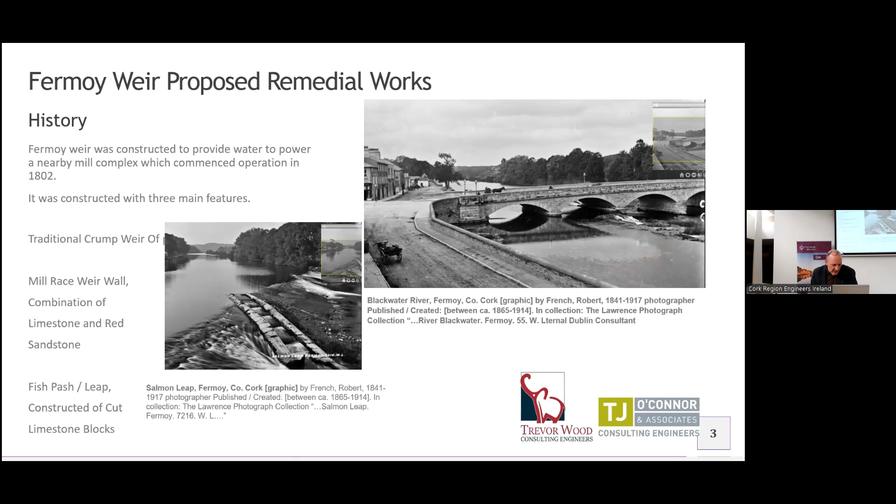Most of the weir is constructed from limestone, all available locally, but part of the mill race weir wall has got 2 courses of old red sandstone, and it's believed that old red sandstone came from a monastery that used to be located in Fermoy. There's a lot of local talk that a lot of the stonework for the weir itself did come from that original monastery, which dates from the 14 and 1500s.

So what was our involvement? TJ O'Connor and Associates were appointed as the main design consultant for a much bigger project that we won't go into in this talk, because this talk is about the weir itself.

As part of their works, they had to appoint somebody with conservation experience, either a conservation architect or conservation engineer, to assess the weir and its condition and come up with proposals for remediation. As it's more of a civil type structure, TJ O'Connor felt it was appropriate to appoint a conservation engineer.

Having had previous involvement with them on Dundrum Town Centre, they approached me and we were appointed in early 2020, initially to complete a stage 1 conservation engineering report to supplement the planning application for the overall works.

When we commenced, we started with a desktop study of previous reports, of which there were numerous. There were quite a number of principal inspection reports for the bridge itself, which encompassed part of the weir, as well as previous archaeological surveys done prior to 2015 - a key date I'll mention in a moment.

These all indicated that the weir was okay but was degrading slowly but surely, and that some work should be done, but nothing ever was. We then undertook a site survey - we actually did two in 2020.

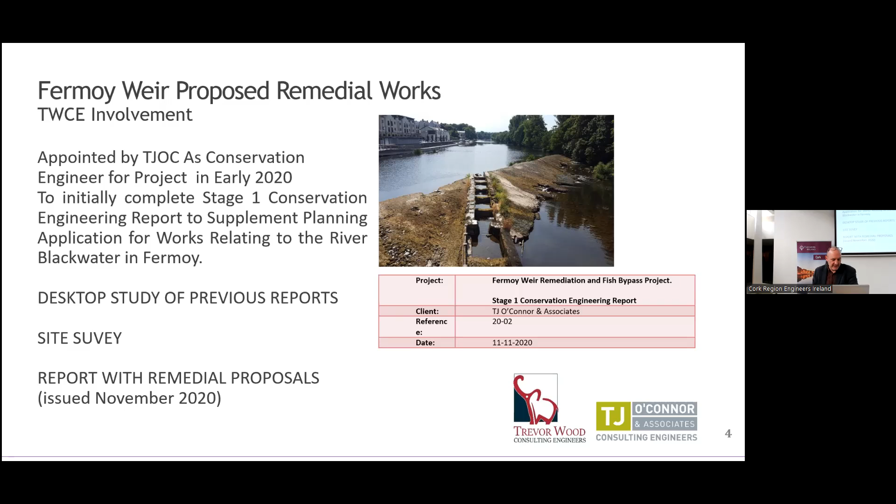When we did our visit in the summer of 2020, we were able to clamber over the weir because the river was in summer flow, very low, and it was completely safe to wander all over it and dig around to find out what was really going on structurally. We issued a report in November 2020, and from that report, the main finding was that there were problems all over the place.

The main crump weir itself is limestone blocks laid on their side with a random rubble core. Then in the 1950s or 60s, a concrete shelter coat, or supposedly a shelter coat, was placed over the top, but that was degrading and had failed in numerous locations.

At the downstream end of the weir, there was quite significant scour. It was obvious that the concrete coating over the top was actually speeding up the flow of water over the weir, and had probably exacerbated the amount of scour that occurred there.

The fish pass itself was ineffective and heavily damaged. Most of the limestone sets had been pushed out of place, but it was still quite obvious that's where the fish pass was meant to be.

As mentioned previously, the mill race weir itself had two breaches, and this is the most serious of them. You can see the original level of the weir up here somewhere, and it's been completely taken out for about a 15-metre stretch.

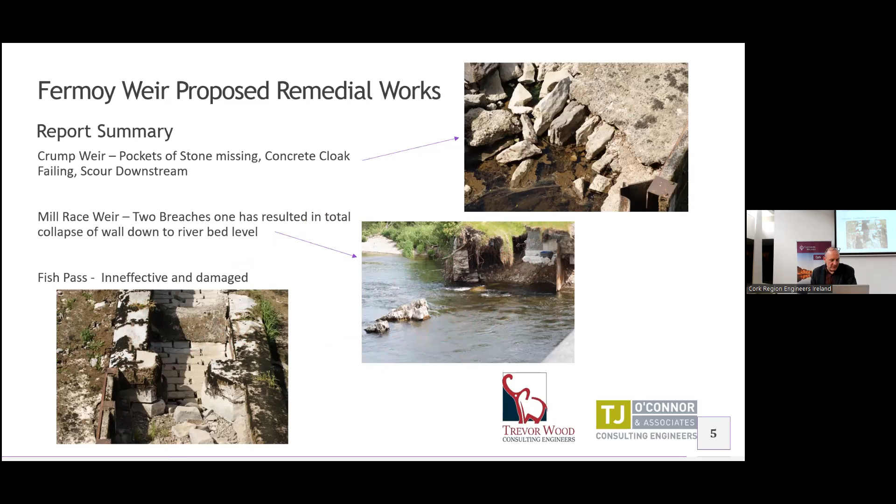In our report, we put together some sketch details of proposed remedials. For the crump weir itself, we're proposing that the top coat of concrete still remaining in place is removed, and the limestone sets are photographed in sections and numbered up. There will have to be quite significant areas where they're lifted, restabilization of the dam's core, and then the limestone sets replaced.

But in those areas, we are recommending that possibly the whole crump weir is looked at, that a geotextile layer is placed there as well to try and prevent the fines from being washed out from underneath the limestone sets. Then at the upstream and downstream face, we install significant rock armour in accordance with design principles for scour protection of bridge abutments, applying the same principles to this weir. In the area where undermining and scour occurred, we create a mass concrete plug.

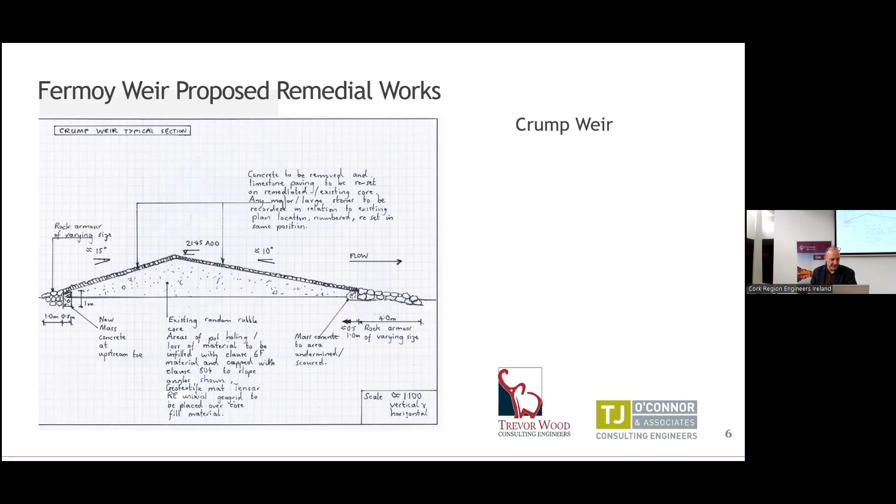It's going to be a bit lightweight in relation to some remedials that have been done, because we don't want to overdo it in terms of heavy reinforced concrete structures for something that's been here for 200 years. It just needs a little bit of tender loving care to bring it back up to standard, or to be able to survive another couple of hundred years.

Then in relation to the mill race weir wall, there's two areas where we've got issues. On the main mill race wall that's still in existence, there's a lot of stonework here and there that needs to be repinned. We're looking at grouting into the main bed of the wall to give it more stability, and putting some rock armour on the downstream face. We're not intending to do anything to the concrete apron that was installed, we believe, around the same time the concrete shelter coat was applied to the main weir.

And then we're looking at placing just at the top of the weir, to make sure that the crump weir is the main weir in operation when the main works are completed, there's just a concrete cap.

We should also highlight that we're proposing that pointing is undertaken, a struck point, but done with a prompt cement. In this kind of river estuary environment, the use of NHLs or even hot limes would be quite inappropriate because they'd be too soft, and within a few years they'd be completely eroded away.

We've then got the issue where the breaches occurred. From a survey undertaken by Mizen Archaeology Services, some of the stones can be seen in the riverbed downstream of where the collapse occurred, but it's believed there's not enough remaining to actually reconstruct properly the breached section of the weir. So the proposal at the moment is to use that stonework to assist with remediation of the rest of the weir that is still in place, and then for this section to be reconstructed in the same profile as the existing mill race weir.

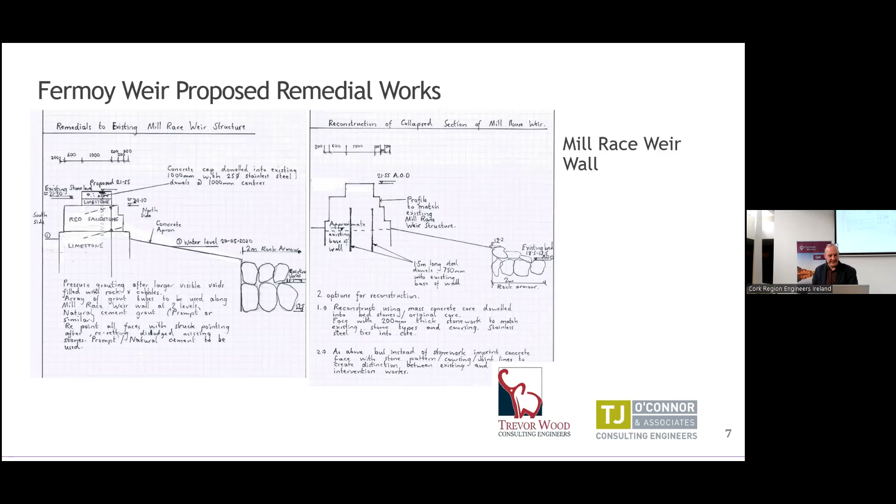Then we come to the fish pass. As part of the main works, there is a new fish pass to be built as part of a relieving channel, as part of the flood defence works. So this fish pass effectively becomes redundant. It was ineffective anyway, because it was found that these type of fish passes don't really work in the way that they were meant to. So the intention is to refurbish the fish pass.

And this is similar to something that we did at Dundrum, which is to encapsulate the fish pass with some geotextile layers so it's protected, and then place fill material over the top of the fish pass and a 150mm fibre mesh concrete slab, just so that's an intervention that can be removed at a later date.

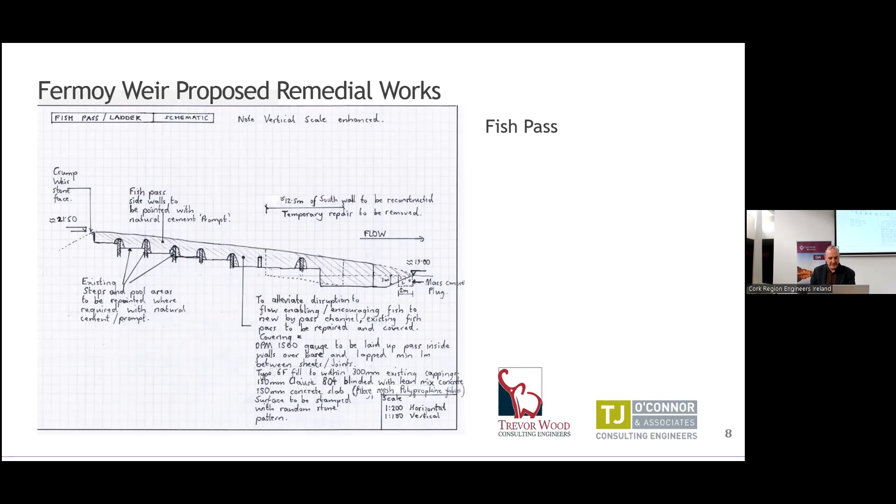And that's the important thing with any intervention works on protected structures, is that they should be honest. They should be identifiable as intervention type works, but also that they can be removed at a later date if needed. So yeah, that's my short presentation, and I'd like to thank you for your attention.

And just as an aside, there's 4 other projects that I've undertaken as conservation works in Ireland, all of completely different interests. And that's why I love conservation engineering so much. John's going to speak later about the whole CARE Accreditation process, which if anybody is thinking about pursuing conservation or involved in conservation, I highly recommend it, because it's the only way that we're going to get conservation recognised at a higher level within the industry, within Ireland. So I thank you for that.

Great. Well, thanks very much for coming. And hopefully you've been given a very interesting insight into a conservation project there, by a conservation accredited engineer. And hopefully some of you are thinking that maybe you should become accredited, because that's the area you're working in. And that's what my talk is going to be about. What is it, and should you apply?

I'll talk briefly about what CARE is, how you go about applying, the assessment process itself, the immediate application cycles for 2023, and then if there are any questions, I'm sure we'll do our best to answer them. So CARE is basically a register of conservation engineers.

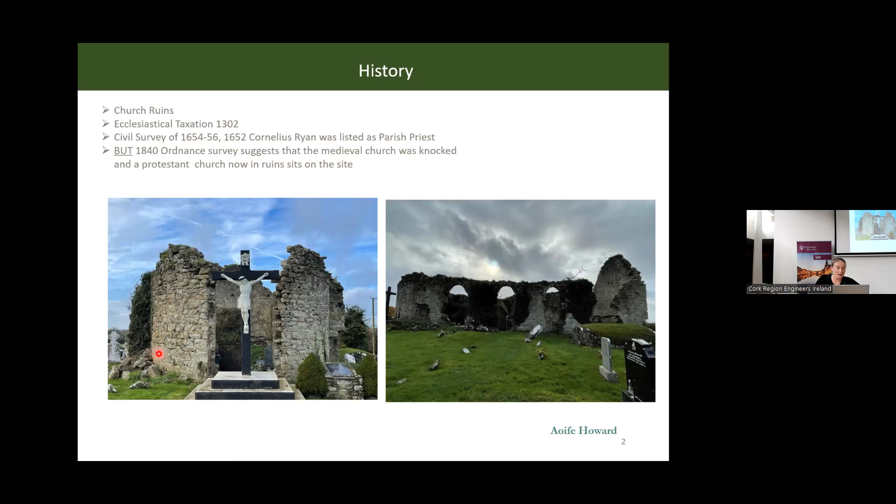This kind of fits in because this is a curved wall, which is quite unusual - it's not your typical straight walls, so it made sense.

So there are issues with this church, obviously. The biggest one is the west gable. You can try to get the photographs from each side of it.

We knew going into it - we started the application, I think, in January last year. Dermot in my office went out, had a look at it, and took some photographs, and we prepared a grant application for the Community Monuments Fund 2022 for Stream 1. Stream 1 covers building works, Stream 2 covers conservation management plans or reports, and Stream 3 covers signage and things like that. So this is a Stream 1 application. We looked at the whole building, but focused on what we thought was most important.

In this case it was this gable. Looking at it from the south side it looks pretty straight, but on the north side it's not quite as straight, so we wanted to figure out what was going on there. Then there's the return walls - this is the south side again, and you can see there isn't much going on with the return walls. So the biggest issue is obviously the gable.

Then there were issues of cracks in different places, and the wall tops were all very exposed - you can see on top of some of these openings there's very little holding them in place. Another issue is the time frame.

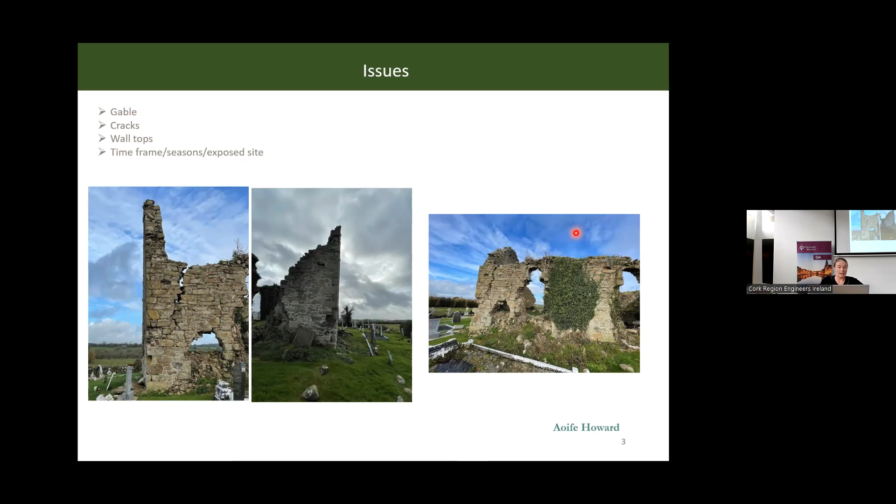Because we're working within the grant system, applications go in January, February every year. Grants are announced in late April, and at that stage a design team is appointed - it could be tendered or appointed. Once the design team is organized, you need archaeology involved, ecology, and surveys, and things go on from there.

So this is where we are at this stage - the survey. The survey actually showed quite clearly where our overturning moment was, and it wasn't in a good place. This really highlighted what was going on in this corner, and you can see the return walls on both sides are quite fragile. So we really prioritized the gable.

The initial plan was to forget about everything else and look at this gable. The inside face of the gable is unusual - we think there was a vault along here, so this is possibly the vault line. It's all rubble underneath, so we're not quite sure what's going on underneath, and it's all quite sensitive archaeological material, so it's not a case of just digging and seeing what's there. These were all part of our initial ideas.

We thought of lots of different plans to stabilize it. These are some of our considerations - this is a different project in Offaly that we did where we put in buttresses in the front.

Unfortunately, there's graves very close to the front here, so just digging a hole in the ground isn't always the clearest option, or it's not possible in this case. And like we said, this is the remains of a collapsed vault possibly here, so again, digging on the inside face is not an option.

So we did consider buttressing outside and inside to try and tie it together. Our plan is to retain as much of the original material as possible, so we don't want to lose anything. But we want to make whatever's done reversible if possible - not always, but that's part of our consideration. Safety always comes first, but reversible if possible. And then we have to think about the visibility of the intervention, because that's something I think is quite important to different groups, such as national monuments.

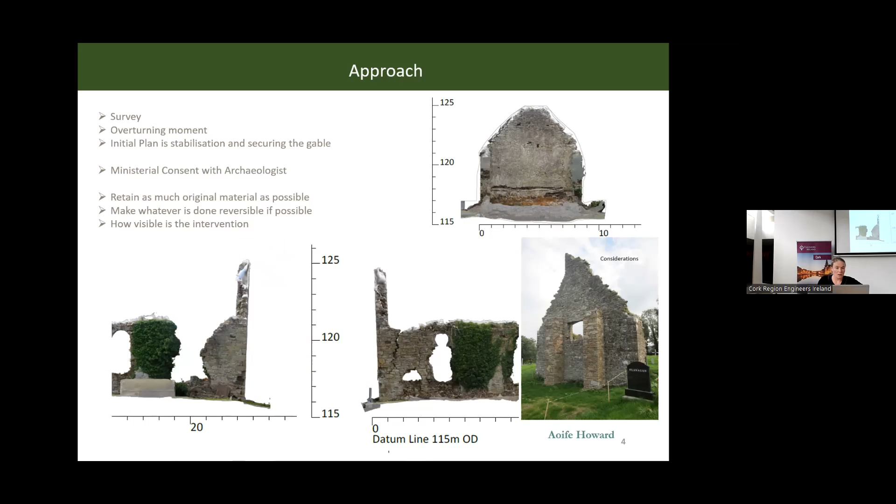But we can get into that when we have a look at what our solution was for this one. So this is just some of our sketches of what we proposed. The people involved were the Tipperary County Council in this case, and we had the Heritage Officer, Roisin, and then

we had Rory. National Monuments was involved. We needed to get ministerial consent. Archaeologists were involved, very much so in this project - Colin Flynn. An ecologist can be involved, not on all - this one didn't have too much growth, just a small bit of ivy, so it wasn't as important as it is in other projects. And we had the survey, which was obviously extremely important in driving our repair methodology.

So in this case, we went over and back with National Monuments quite a lot because it was quite an unusual job. It was quite urgent, we felt. We did feel like a few heavy winters or big storms wouldn't leave it in a good place, when we just wanted to retain the material if we possibly could.

So it took a while to get all this approved. While we were appointed in April to oversee the works, it took a lot of going over and back to try and come up with a solution. It took a long time to get the survey back, so a lot of things were involved. It was August by the time we were looking at this and talking to National Monuments about it and trying to get a repair strategy.

The contractor was appointed and we got it to site. But unfortunately, weather was really against us this year, which was quite unfortunate, because with these grant schemes we've been very lucky the last couple of years, with September and October being quite nice. This year, October was very, very wet, and it really hindered these projects, and it showed how vulnerable we are to time delays. Whereas we don't have these sites on site in May or June when we potentially have good weather, and we should really be getting them underway.

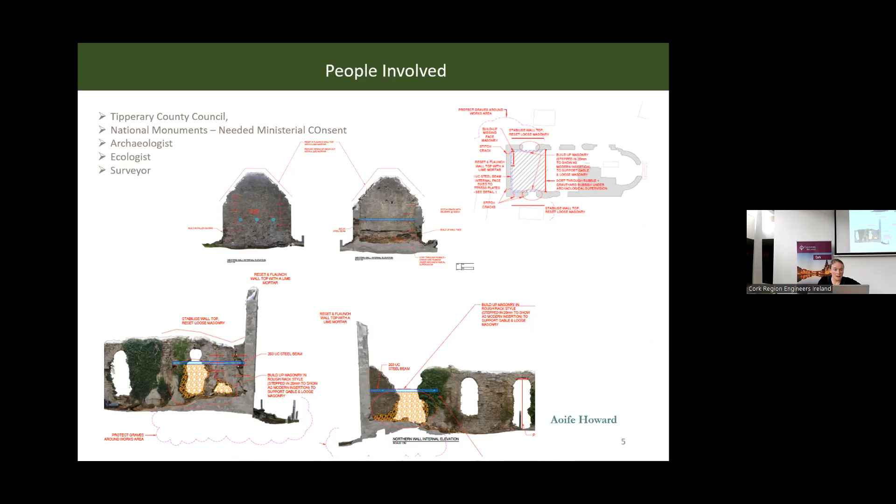So the walls were built back. It was a lot more stable than when we got involved first, but we went back to having a look at the base. As part of the ministerial consent, it also allowed for probes at the base of the wall to see is there a foundation. We reckon these are kind of the foundation stones along here.

At this stage, the cracks were stitched, the wall top secured and repointed, and this was just finished recently in February. So we went back to a discussion. We're kind of waiting for the weather to improve, it's a bit too cold this week.

What we're going to do is we have permission for the probes, so we're going to do a few probes in this wall at the base just to see if it's realistic that we can underpin, because these graves are in it. At first I thought they were very close to the wall, but we've had a chat with the archaeologists, and while they're close, a lot of them are facing out from the wall. Also the medieval remains have been removed at some stage. The graves here are early 20th century or 19th century, so they're not modern graves, which is good, and they're not very, very historical graves.

So we're in a position where underpinning is now back on the cards again. I guess we're waiting for the weather to improve. But at the moment the walls are a lot more stable, and the 2023 works have been completed without the steel. So discussions are ongoing.

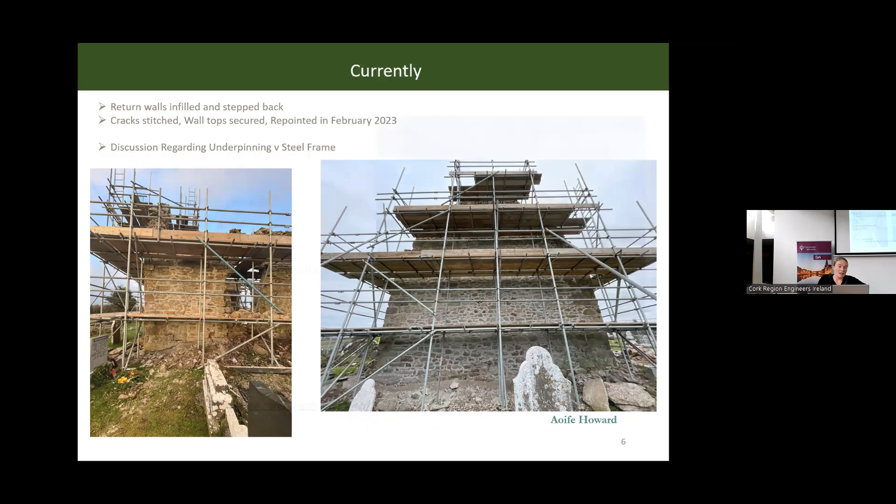I guess the future is we need to finish stabilizing it, obviously, and we need to decide on the steel frame versus the underpinning. The steel frame was always going to be a backup. It was a security issue, it was to make sure that the overturning issues were sorted.

But now we know that two return walls have been built in, so they're in a much better, a lot more stable position than when we got near it. The CMF 2023 Stream 1 application has gone in, and our plan is to finish off the rest of the walls, but also to finish off whatever our final solution is here.

So I guess my thoughts on this are that all these projects have different solutions. It's not just a church ruins, let's repoint it. They're not a simple solution, they all have different issues with them, they all have different ways of figuring it out. So there's a bit of thought required for all of them, and it needs a team.

It needs the archaeologist support, which has helped me greatly on this one with the underpinning. It wouldn't have been possible if I didn't have confirmation from him that we were in a better position to do it. So the survey told us that the overturning was critical.

And then on other ones, the ecology can be very important. Some of these jobs, some of these church ruins, are completely overgrown. And then it's talking to the councils and talking to National Monuments and getting everybody on board and everybody on site to talk about these jobs. So it's a team effort, but it's very interesting. I think that's it, so thank you very much for your time.